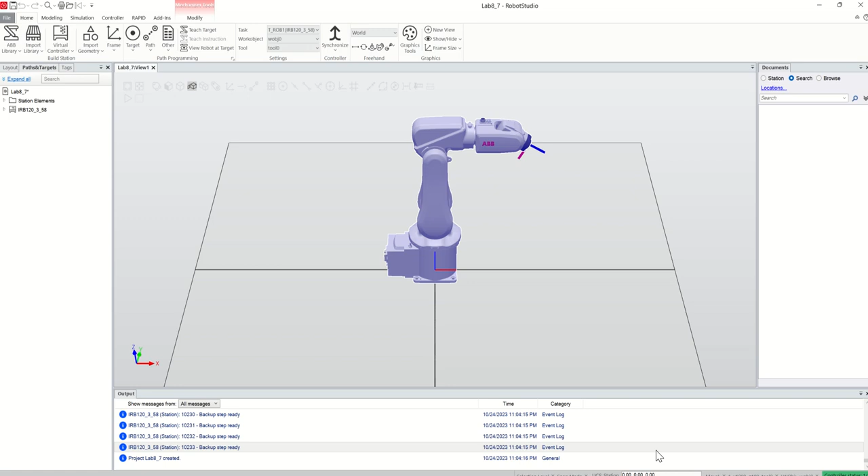So in this video, I am going to show something like this.

First of all, I just want to make a full circle. The robot will come here, it will pick the object, go to place position one, place the object, then go back to the home position.

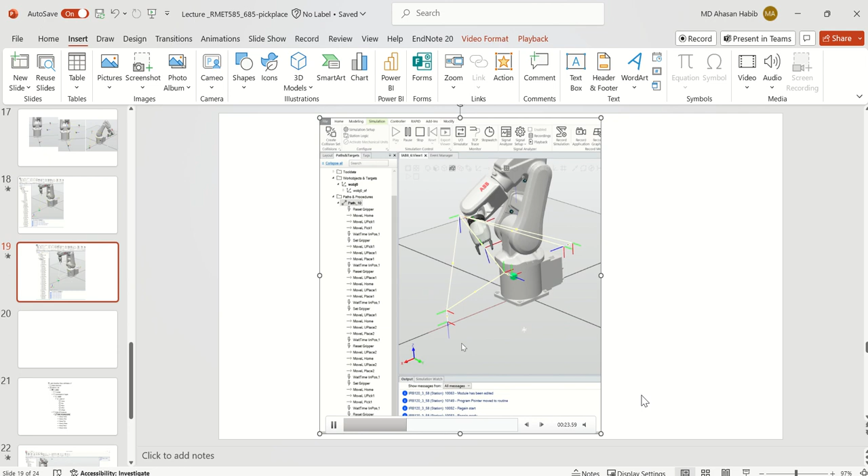Coming back from the home position, it will pick again from there, go back to the home position, and then we would need to create another target as place 2, so it will place there from pick position 2.

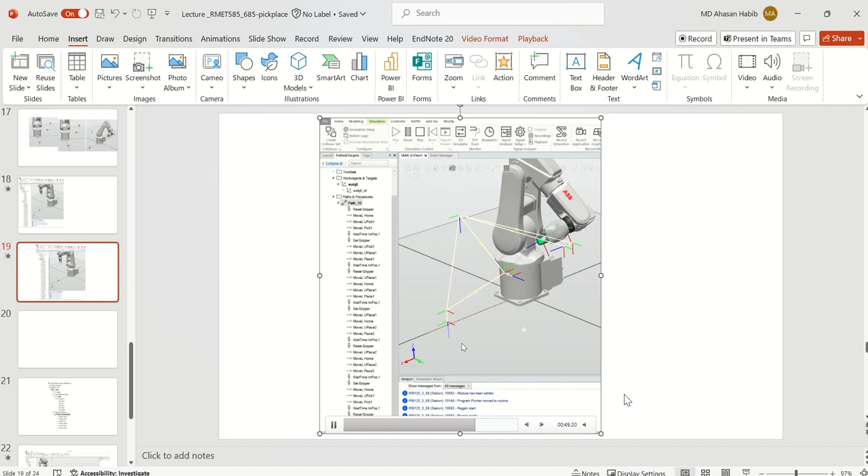Then it will again come back from the home position and pick from there, go back to the home position, and from home position it will go back to put that thing in the beginning position it was before.

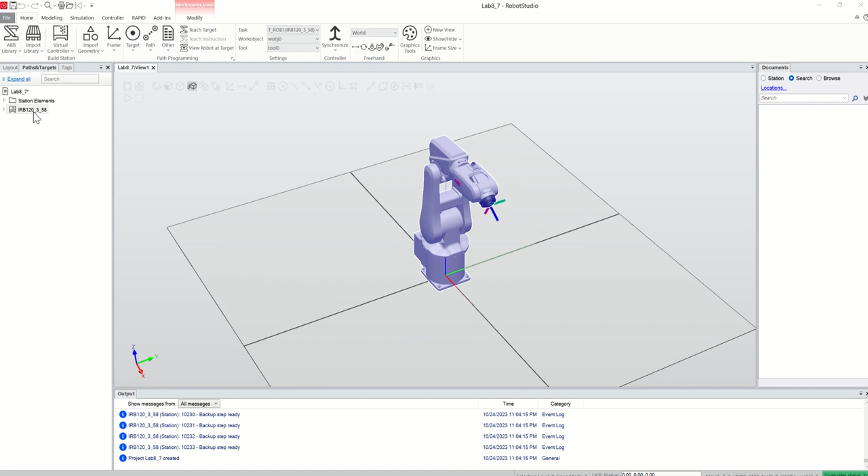So to do that, let's start the modeling. I'm using the IRB 120 robot here, and as a gripper I'm going to use the smart gripper.

From the layout, I would need to go and attach it to the robot. A couple of quick things I would need to do, like making it 90 degrees, and this one 90 degrees as well.

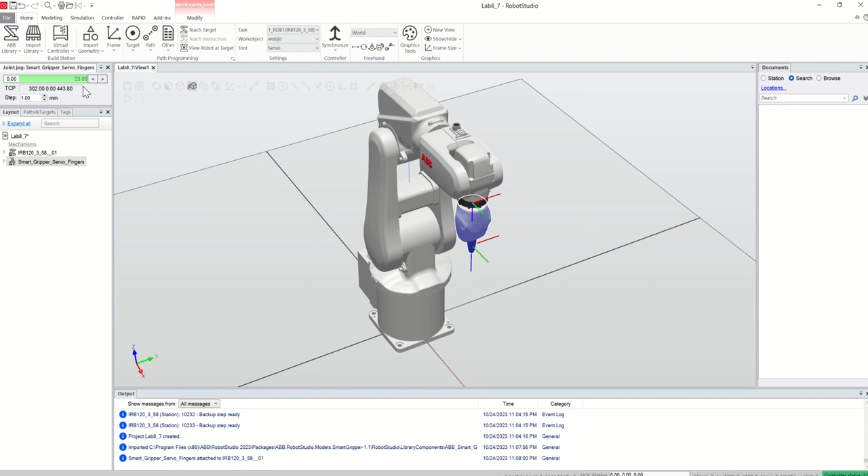Enter, and then if I go to smart gripper servo, I can see it is opening and closing. But I have something to do from the smart gripper, so I need to right click and go to modify mechanism, and double click.

Right now all the values are 0, so let's make it 25. You see it is opening. Click OK.

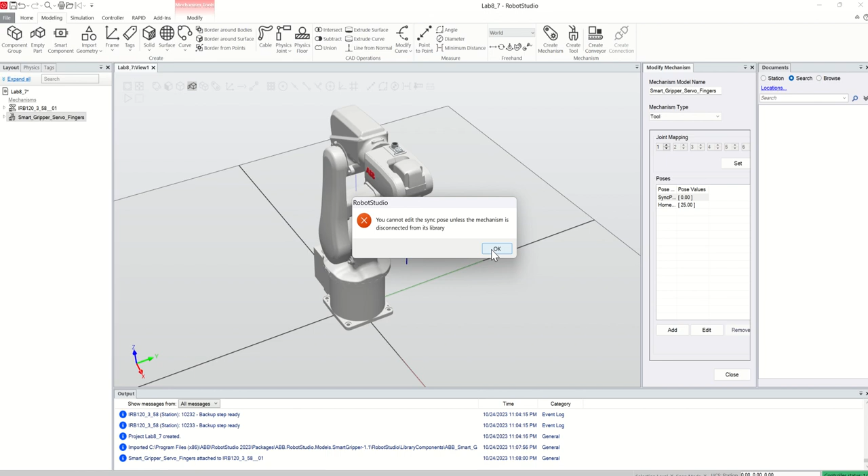If you double click here, it cannot do anything because I would need to disconnect from the library. So if I'm disconnecting from the library now, it should be able to - let's make it 10.

I got it. So now the nice thing is if you click this and that, you will see it opening and closing. Once we got this part, if you want to save it as a library, you can do that.

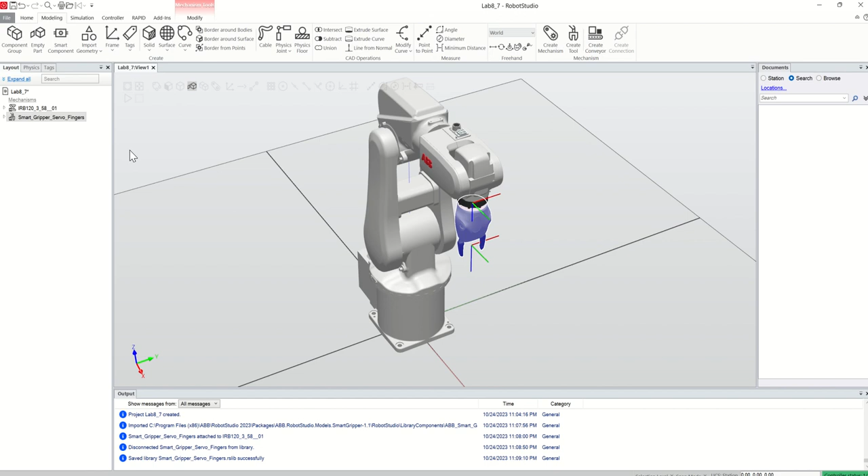And now I would need to make three boxes at three locations. Let's clean it first and make it a little smaller.

So the first box corner point is 400, 0, 0, and this is actually 20. I got one. Let's make it a little different color, maybe...

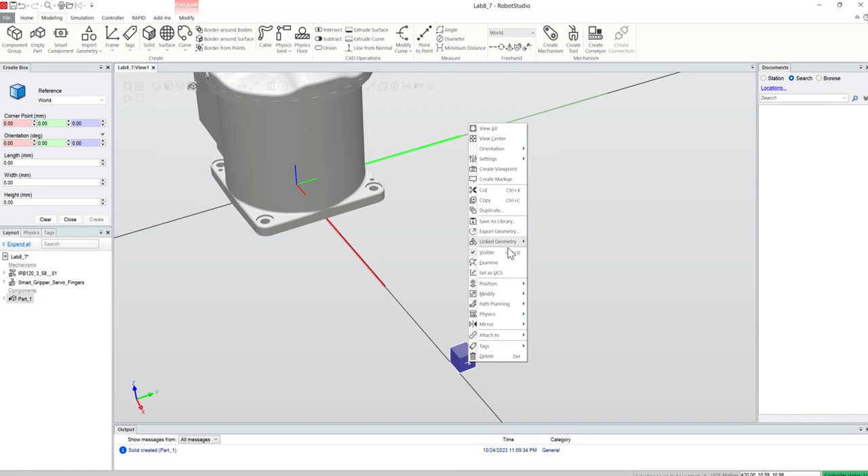I don't know, maybe red color this time, or I think I like green color. Let's make it green. And I would need to make two more.

Another one's corner point is 200, 200, 200, and the same 20 length, width, and height. I created the second one, and the third one's corner point is basically...

0, 300, 300. So let's make it 0, 300, 300. And again length, width, height is basically 20, 20, and 20.

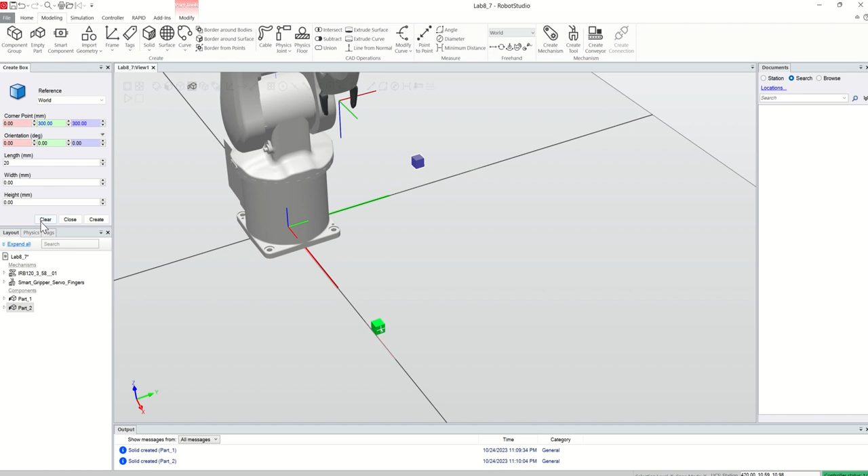So I got three of them. As the principle I follow all the time before doing any kind of controller attach/detach related thing, I will make the toolpath first.

I'll say okay, if it is working then I'll go for the controller thing. So to do the toolpath related thing, I would need to make a couple of targets.

So first target I want to make at the TCP. I'm just teaching, and yes, so it created something.

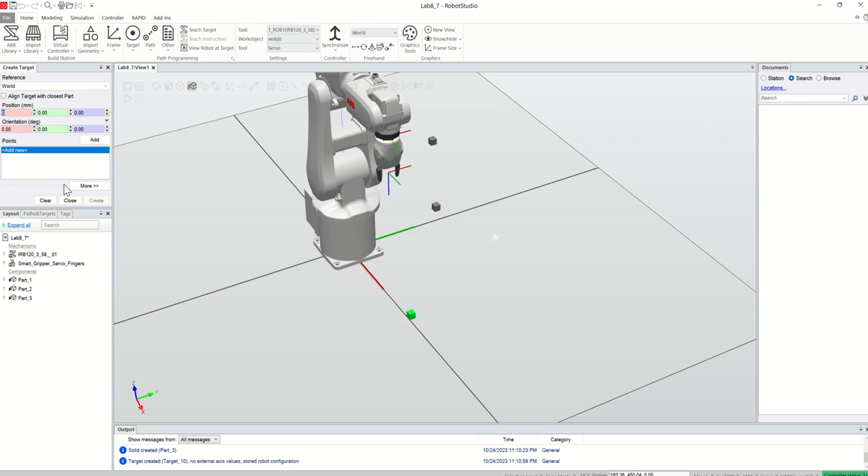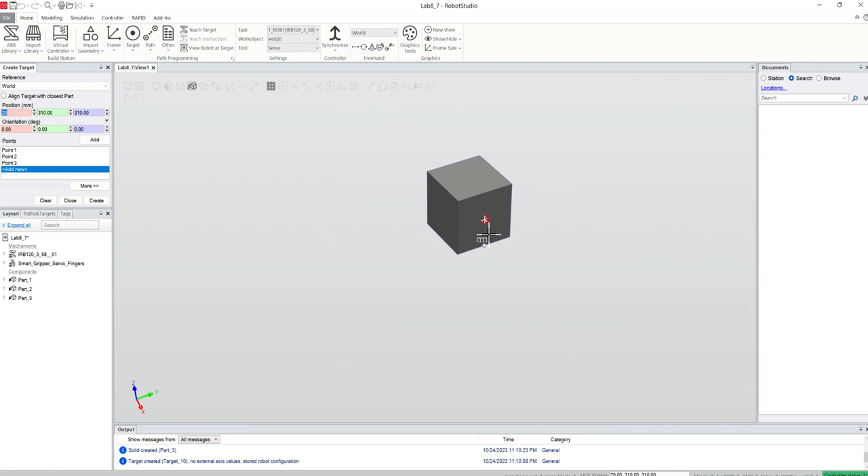I would need to make sure I'm clicking this one, and the first point I'm going to make is on top of the center, and another is at the left side of the center, and the third one is at the back, or maybe in the front, of the center.

So I got three of them, I can create them. So I got a couple of targets total. I can close it, and again before doing anything I want to make sure they are working.

So I'm going to make the new path. I know it is showing something like this, and I know there are some crosses, but we can fix it.

I'm going to do a couple of changes here. The speed is around 100, and the zone is fine.

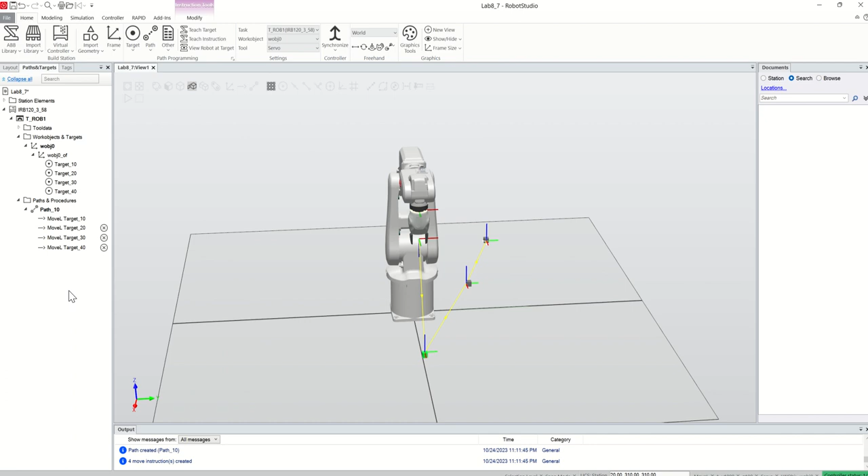I'm seeing still three crosses, and if I just do move along path, I will see it is doing nothing. There's a good reason why, because if you see the Z axis, all of them are not the same.

So I would need to do some modification to make it work. Let's go to target 20, and let's change the...

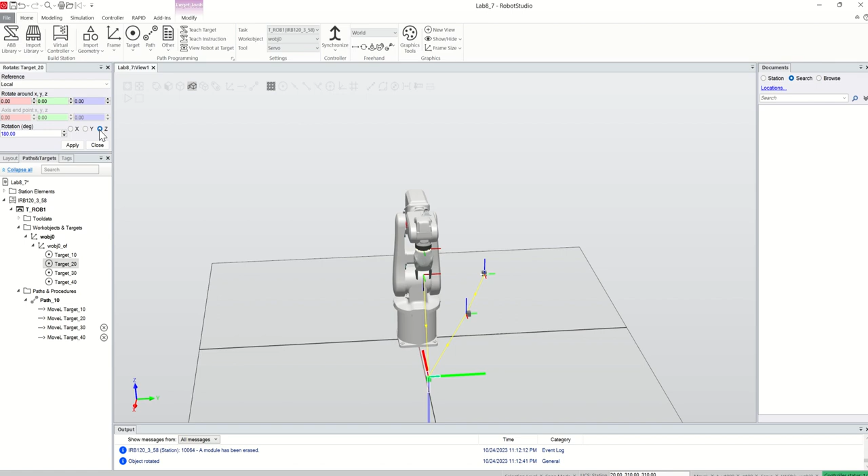modify the target, and the rotation will be 180 along the y-axis, apply, and 90 along the z-axis. So I'm applying it. What I can do, honestly, I just want to see two things.

I just want to see the robot at the target position. If I go there, it is not showing anything because it will not work. The Z axis is not in a good position yet.

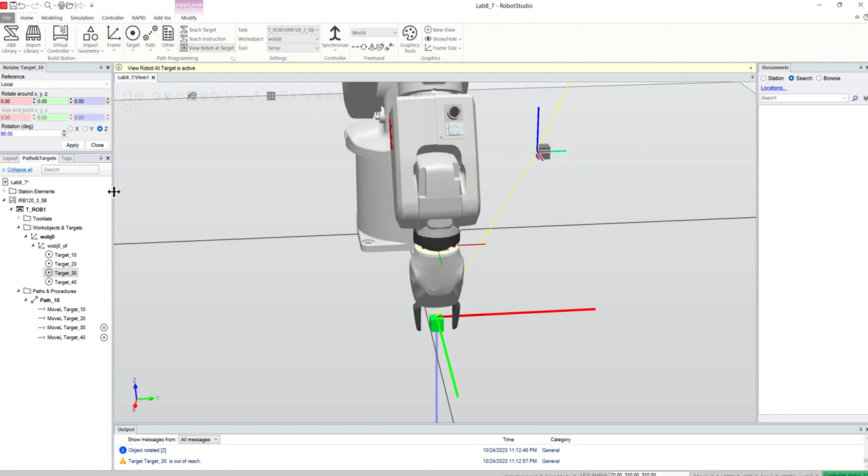So here, I would need to do 180 degrees with respect to y-axis, apply. It is a little better, and then negative 90 along z. So okay, it looks like it is at least reaching there, and then I can go for target.

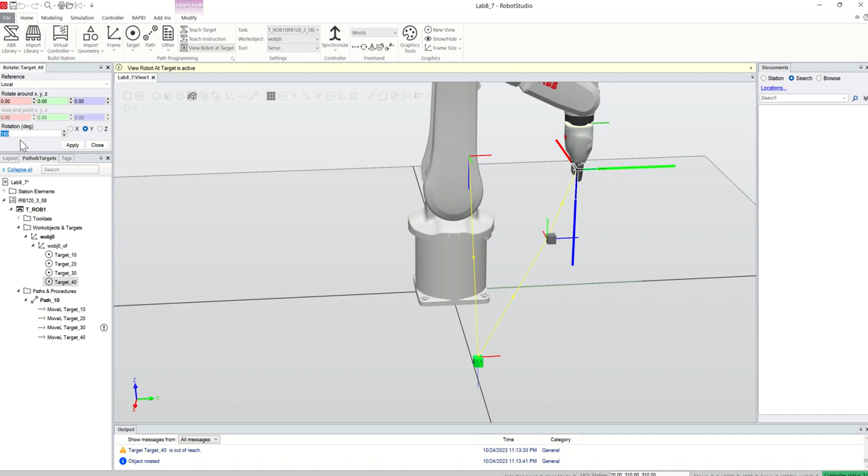Target 40 again, 180 with respect to y, apply, and the last one is basically okay. I think let's make it negative 90 with respect to y. Yeah, I want to make something like this.

So basically, if you start from the beginning, the 90-degree with respect to y. So I can close it. So I got the home. I'll make them home. This is one, two, and three.

And if you want to make a move along path, let's see if it is doing something. Yeah, basically it is starting from the kind of home position. It will go there, and it will try to go there, and it will stop. So that means still we got one - what is that called? This is basically called a robot axis configuration error.

To resolve that, how about if I just go back from here to the home position, and then I can go to target three, the last target. So now if I try to move it, let's see if it works.

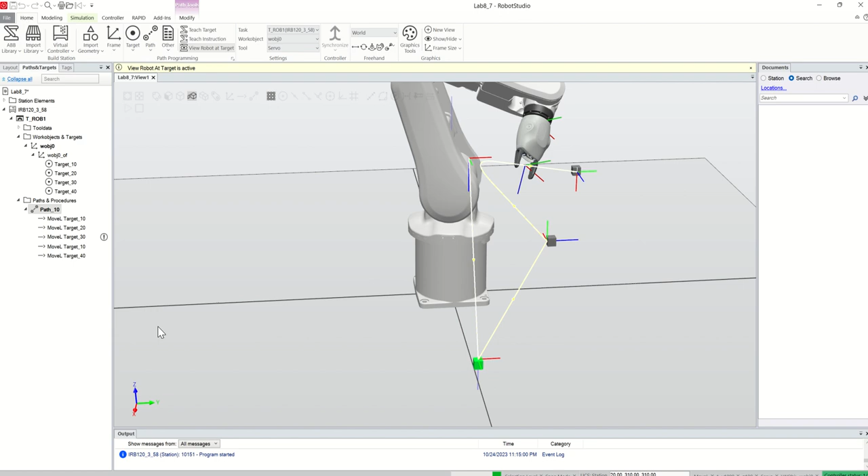So it will go to the first target. Yeah, so you see, at least it is not stopping, which is good. Now I know I just created this one, and I didn't change it.

Let's make it 100, and the zone is fine. I would need to honestly make a lot of other paths. So at the end, maybe I will change the speed and the zone. I'll make it 100, and the zone should be fine. So yeah, this is at least working.

And I want to make a couple of offsets from pick one, pick two, pick one, place one, and place two. So Control C, and paste all of them.

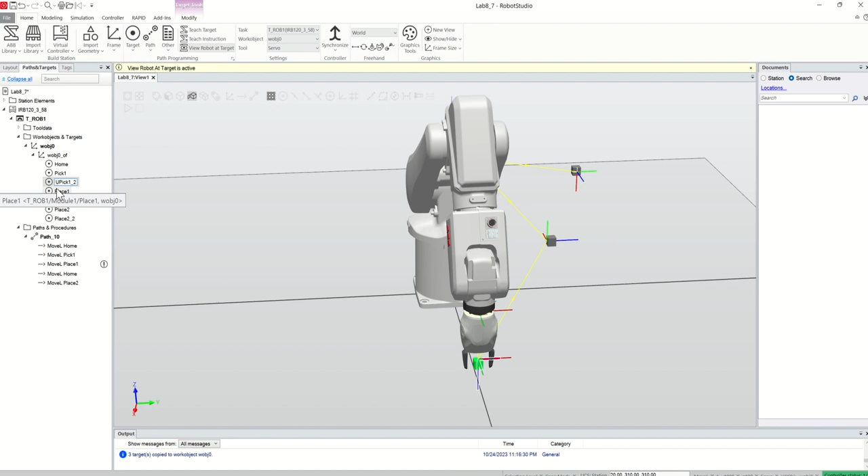So first thing first, this one should be U-pick, right? So let's make it U-pick one, U-pick one, and let's make this one maybe U-place one, and likewise I will change all of them.

Okay, after changing all of them, I'm basically offsetting -50, -50, and -50 with respect to z-axis, and I can click OK. Now let's make the sequence one more time.

From the home, it will go to U-pick first, right on top of the pick position, and it will go to pick. Again, it will go to U-pick position, and then it will go back to U-place one. Then it will go back to place position one. Then again, it will go back to U-place.

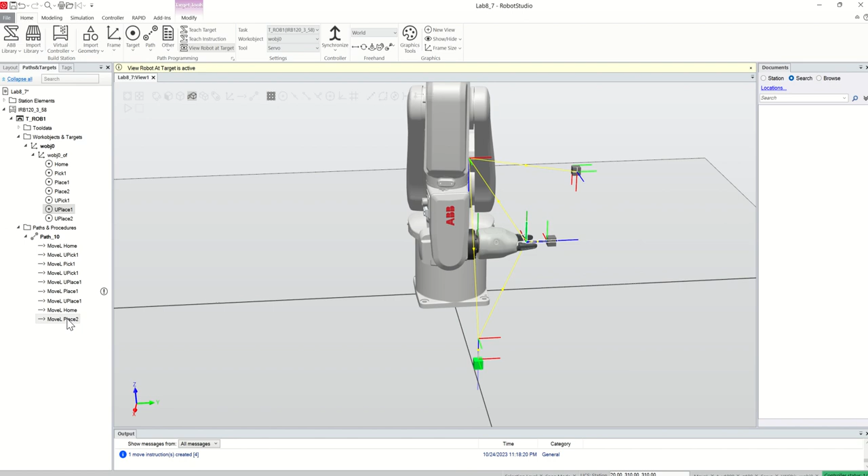Then it will go back to home. And from home, it will go back to U-place two. And it will go to U-place two, and then, sorry, place two, and then last U-place two. And from there, it will go back to home position.

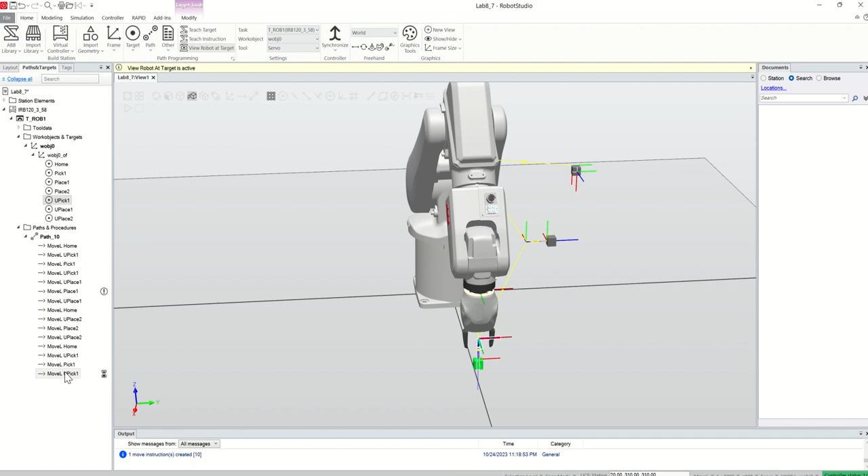And then from home position, it will go to U-pick again, and then it will go to pick position one. It will go again to U-pick one, and it will go to home position. So let's see - yeah, you pick, then you place, you place, and then it will go back to home. Then you place two, it will go home.

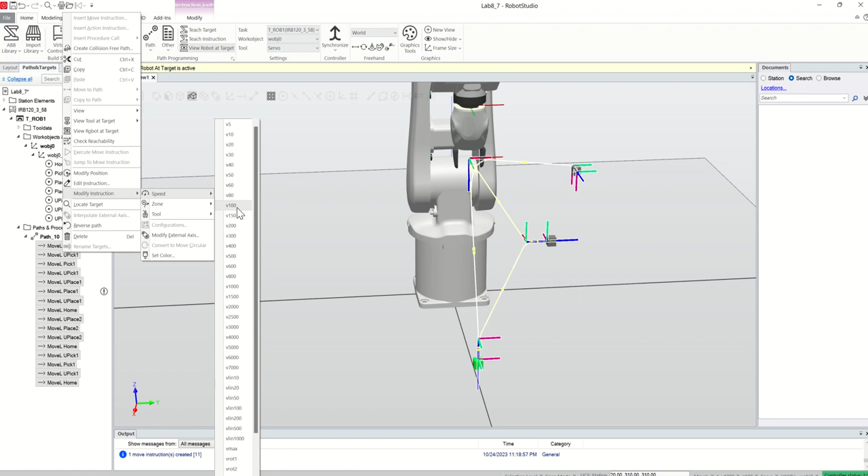Okay, let's see if it works, right? And as I mentioned before, I will change the speed to 100, and I will also change the zone to fine, and then I will try to move it along the path.

So first of all, it is coming to the first pick position. It is going back to first place position. It will go back to home position. From there, it will go back to place position 2, and from there it should go back to home position, and finally it should go back to pick position 1, and from there it should go back to the home position.

So the nice thing is the whole toolpath sequence is working. Now the next step we would need to do is go to the controller.

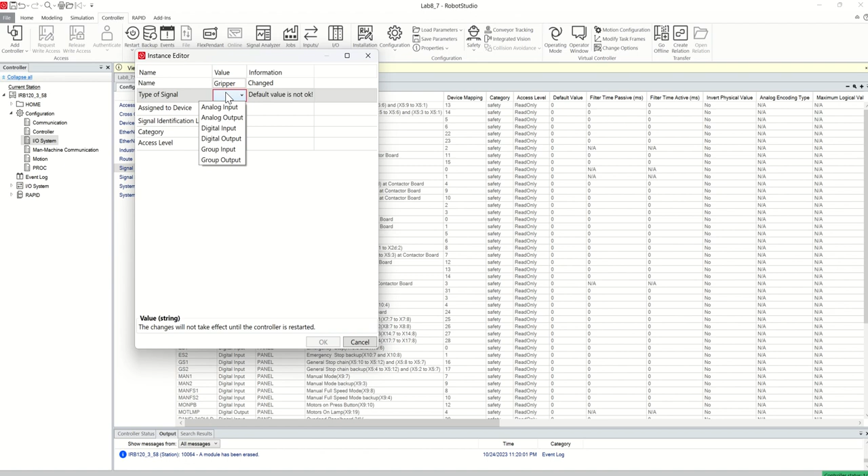From the configuration, we need to make a new signal, and I will name the signal gripper, and my output type of signal should be digital output. Default is okay, and then I would need to restart the controller. It will take a couple of seconds, and it should be online. Yeah, it is online now.

Now under the simulation tab, I will get a dropdown like configure, and I would need to add a couple of events here, and these are really important, so you need to be very careful. So for gripper, I'm going to make one event for gripping and another event for releasing, or I can say one event for set and another for reset.

So the first one is for gripping, or set, and I'm going to go to move mechanism to position next, and my mechanism is my smart gripper, and that is basically the sync position where it will grip the object, and I'm finishing. I will do the action a little later.

Let's make another event where I want to again use the gripper, and this time the signal is false because I want to release it, or reset the gripper, and then it should go to home mechanism position, and my mechanism is smart gripper, this time home position, and finish.

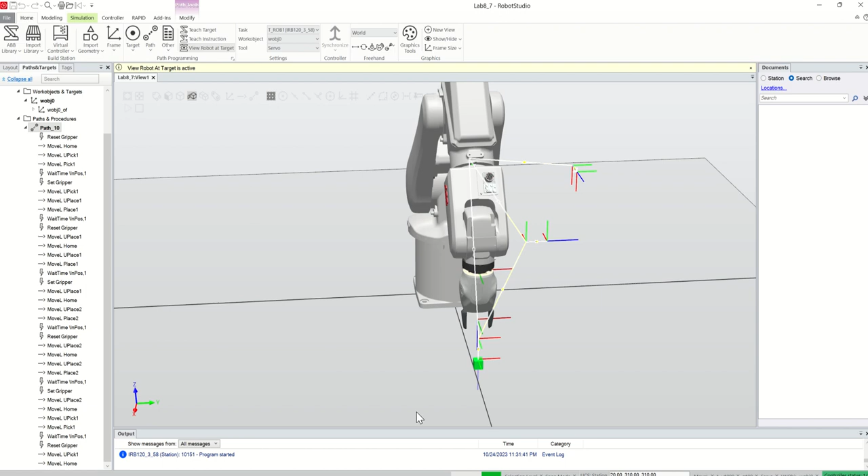Okay, it is holding. It is gripping basically. It is taking it to place position one, going back to home. It should come back from the home position to place position one. It is gripping from there, going back home, and trying to go back to place position two.

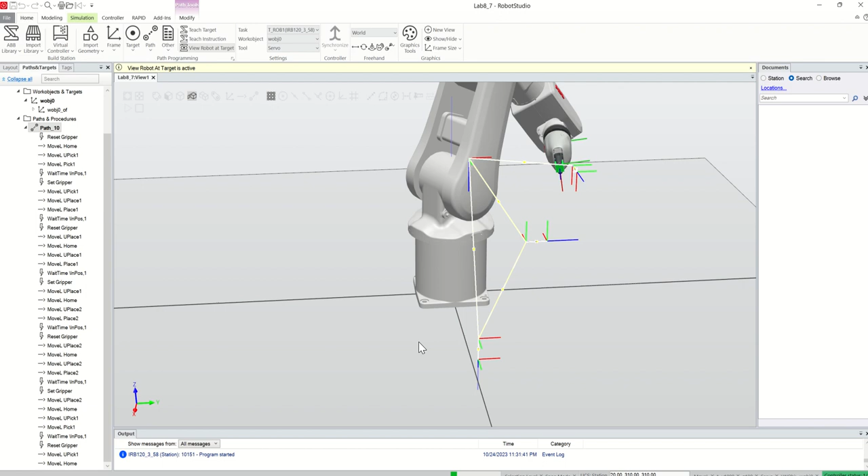It will put it there. It will come back to the home position, and then from the home position, it is going back to place position two, and gripping back the object from there to home. And finally, it should go to the position we picked the object from at the very beginning. And the gripper should go back to the home position.

So that's the thing I wanted to show in today's video. I hope it helps.